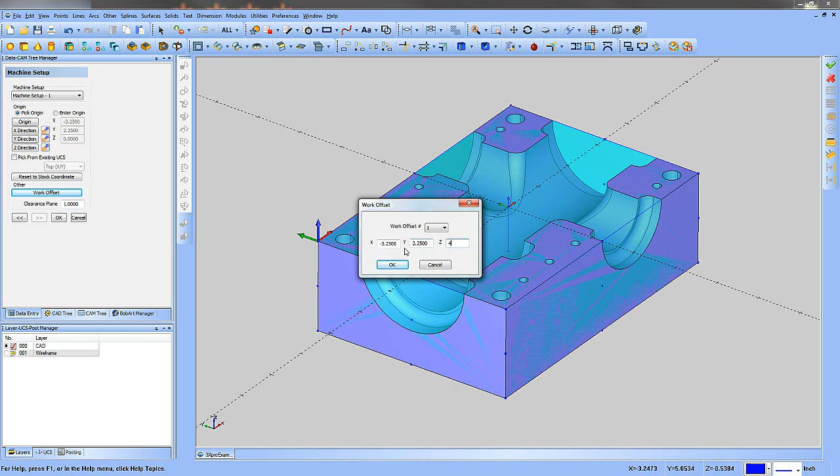The next thing we'll see is our work offset. This is for the guys that have the full machine simulation, to locate this part on the machine so it doesn't show up inside the table. I'm going to say minus 3.25 in X, and in Y we're going to say 2.25, and in Z we're going to go 4 inches high so that it sits up above that table in the correct position. Then we'll just hit OK.

And then over here's our clearance plane. I'm not going to make any changes to that, so we'll just hit OK.

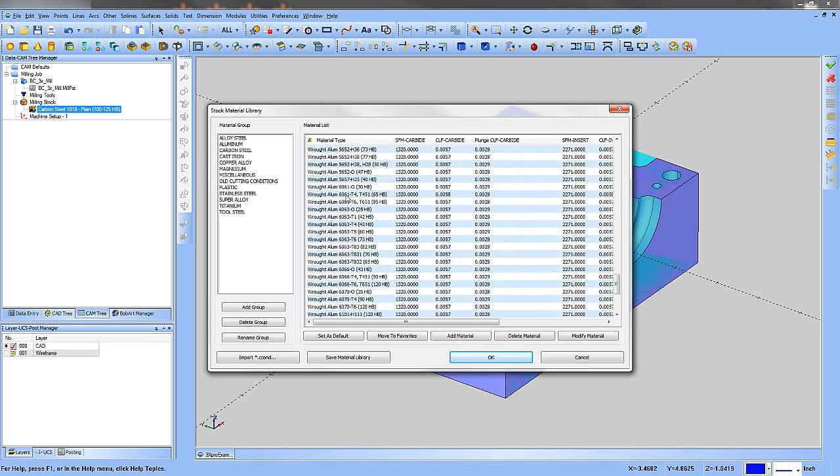Now the first thing we need to do is go and set up our material. We're going to right click on where it says either carbon steel or whatever shows up right underneath milling stock, and then say edit. In this case, I'm going to go to aluminum and scroll down, and pick something like a wrought aluminum, we'll say 6061, and just hit OK, and that's going to change it. Now this controls our speeds and feeds, so when we go through these tool paths, when we get to the tooling page, the speeds and feeds are going to be pulled off of that material.

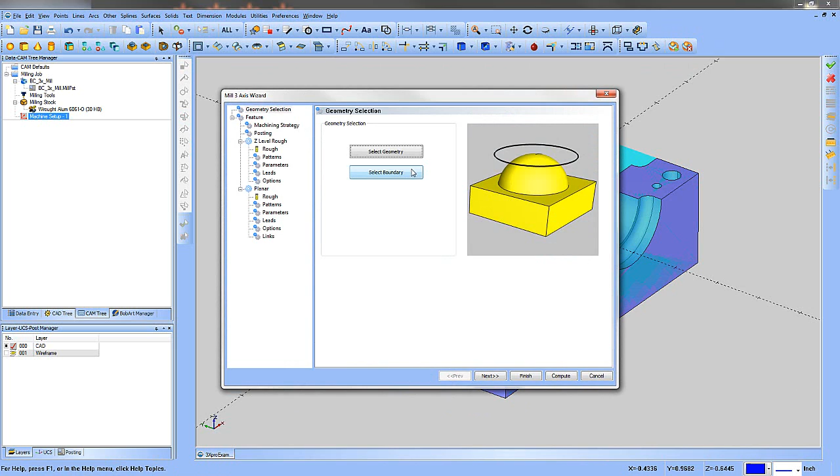So we're going to right click on machine setup, go down to mill 3-axis. We're going to select our geometry, and for 3-axis parts we're usually going to select the entire part. Then if we want to use something to contain the tool to a specific area, we're going to use a boundary. In this case, we're not using any boundary, so we're going to go ahead and hit next, and then say next again.

For our tool path, on this pass we're going to be running two roughing passes. One's going to be a normal advanced rough, and the second one is going to be an advanced rough with a rest rough. So I'm going to go down here and click advanced rough, and then click this arrow to move it over so that we have two advanced roughs.

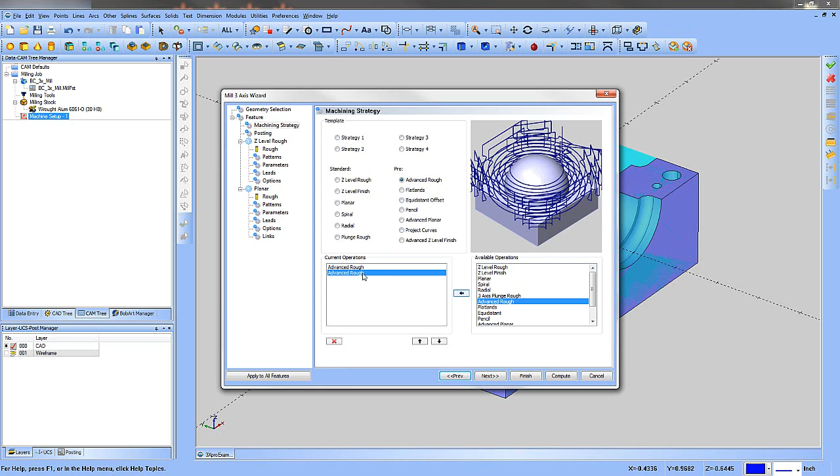Then we'll hit next. Nothing to change here, we're not changing the work offset. We're going to use our G54, go next, and then we have to go set up our tools.

So we're going to go up to our tool crib, go over to end mill rough, and then click add from tool library. We're going to sort by the diameter and then go down and choose our standard length 3/4 inch flat tool, and then just hit OK once and then hit OK again, and it's going to place that tool in there. Now all our speeds and feeds over here are set up off that material, so we're not going to make any changes to this. If we need to go in and change it, you can just uncheck use system feeds and speeds and make any changes that you need. So then we'll hit next.

Our cut patterns, we're not going to make any changes here. We're using an offset, we're going to zig, and we're going to climb mill. And then for our depth of cut for cutting this, we're going to enter a value of...

0.375 and a step over amount of 0.2 with 2 intermediate steps in between each cut. So each pass that this takes at its normal depth of cut, it's going to come through again at the end and clean up all the steps that are left with 2 passes.

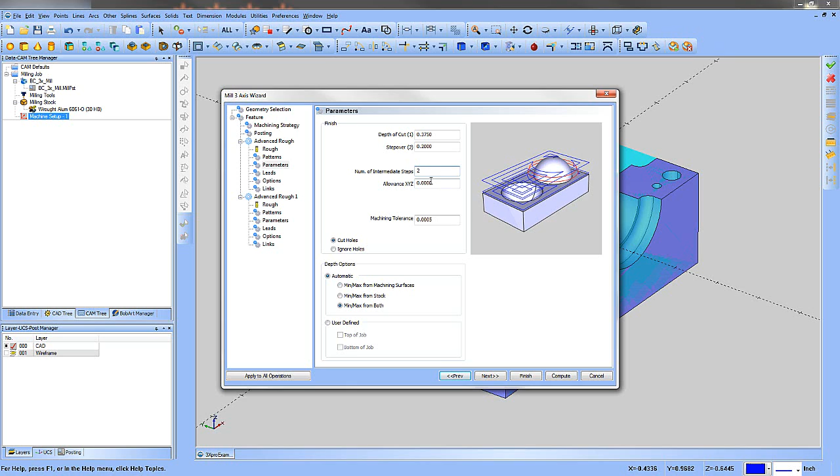So it's going to make those steps a little bit smaller. And then for our allowance in XYZ, we're going to change this to 0.04 and then just hit next.

We're going to ramp into the part using automatic, and we're going to leave our ramp length at 0.25, and we're using a center cutting tool, so we're going to make sure this is checked on. So then we'll go ahead and hit next.

Rest roughing, that's going to be for the second option, so we're not going to do anything to this page. Go next. And then for our links on the first advanced rough, we want to use an S-link and a rapid retract for any large gaps. And then go ahead and hit next again.

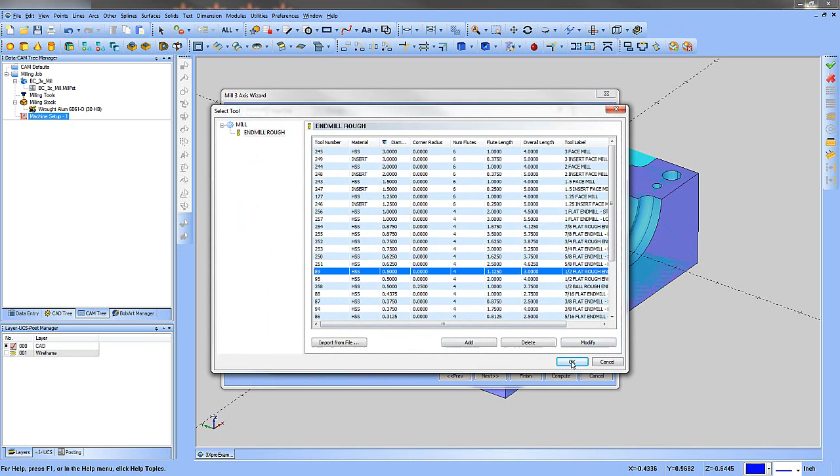And now we're going to go up to our tool crib and then go to end mill rough and then add from tool library. And then we're going to sort by the diameter and go down. We're going to choose our 1/2 inch flat end mill with the standard size. So we'll just hit OK and then hit OK again.

And then the only thing we're going to do is come in and change the protrusion length. Any of this information in here is editable after you pick this tool, and we're going to go ahead and make our protrusion length 1.5 and then go ahead and hit next.

Our patterns, again, we're not going to make any changes there, so we'll hit next again. And for this depth of cut and step over, we're just going to use the defaults. We're not adding any number of intermediate steps, but we do want to use the same XYZ allowance because this is still a roughing pass. So we're going to say 0.04 and then go ahead and hit next.

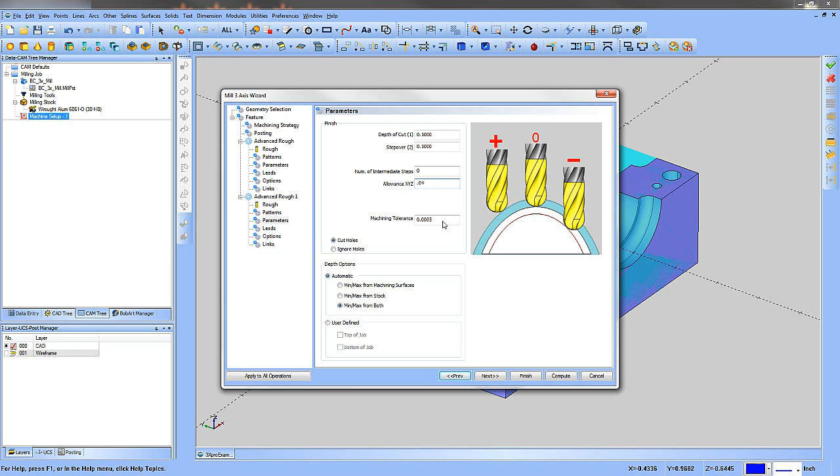We're going to ramp again. And on this one, our ramp length we'll say is 0.2 because we're just using that 1/2 inch tool. And then hit next again.

This is the option where we're going to add that rest roughing in. So we're going to say rest roughing. We're going to use the previous operation so it automatically pulls up the previous tool. And then we'll hit next.

And on this one again, we're going to do an S-link with a rapid retract for large gaps. And then just hit compute.

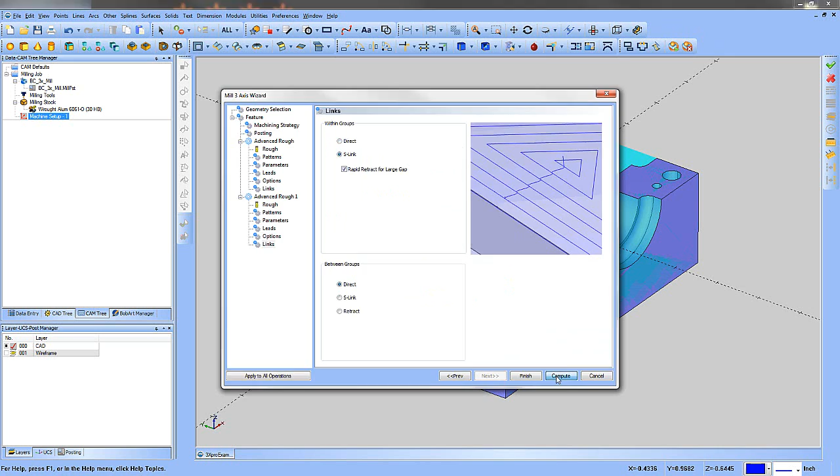So then after the toolpath finishes computing and we see it on our model, we're going to come up here into our cam tree, right click on milling stock and just say blank. And then I could go down to my machine setup and right click on that and go down to blank on blank toolpath. I'm just turning that off for now.

That way we can see these individually by just clicking on the advanced rough, and I'm going to see all the cuts for that advanced rough. And then I click on the advanced rough 1, or if we wanted to rename it, we can right click and say rename advanced rough 1, get rid of the 1 and say rest rough. So we know the difference between the two.

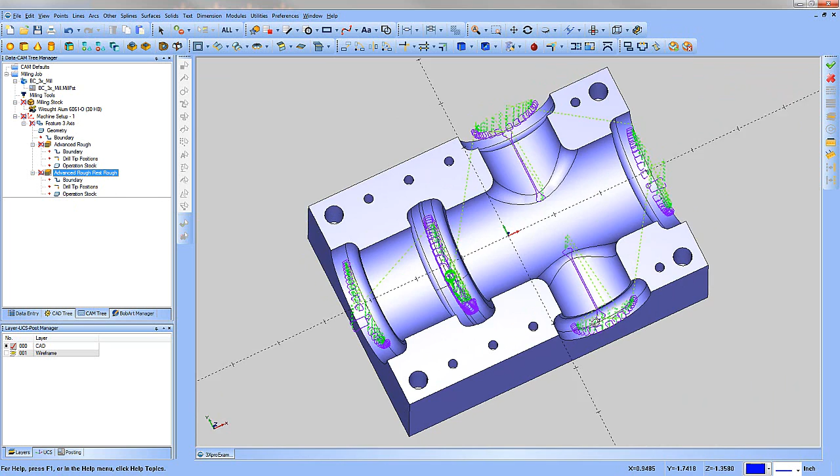So then we click on either of these and we can see just those tool paths being processed. So we'll see that rest rough is going into the areas where this previous tool couldn't clean up very well, so it's going in and fitting into those smaller areas and just giving us a much cleaner cut.

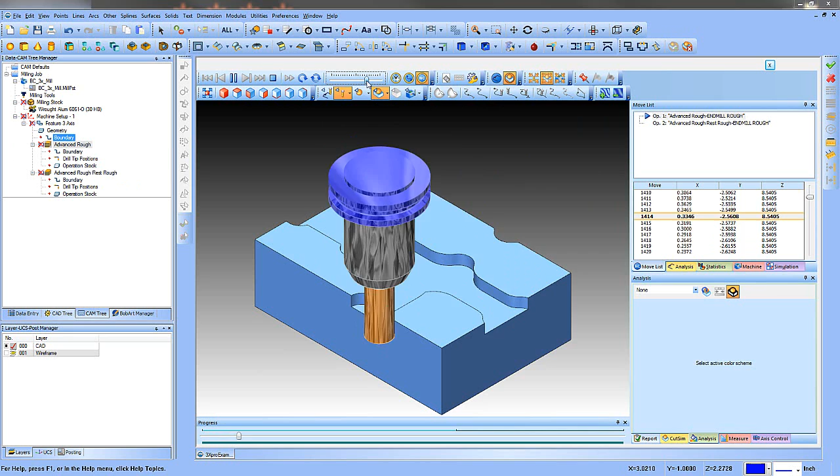Let's go check this out in the simulation. So we're going to go up to modules and then simulation, and then when the simulation loads up you can go ahead and click this button right here to turn the tool path off, and then we'll just hit play and we're just going to see the tool zip around the part, and we're moving pretty quickly.

You could slow yours down using this slider bar. Pay attention to these large grooves here, because you'll see them get cut in half - those are the intermediate steps as it worked its way around. Now we're doing our rest rough, and we're all done. So that's the roughing pass.

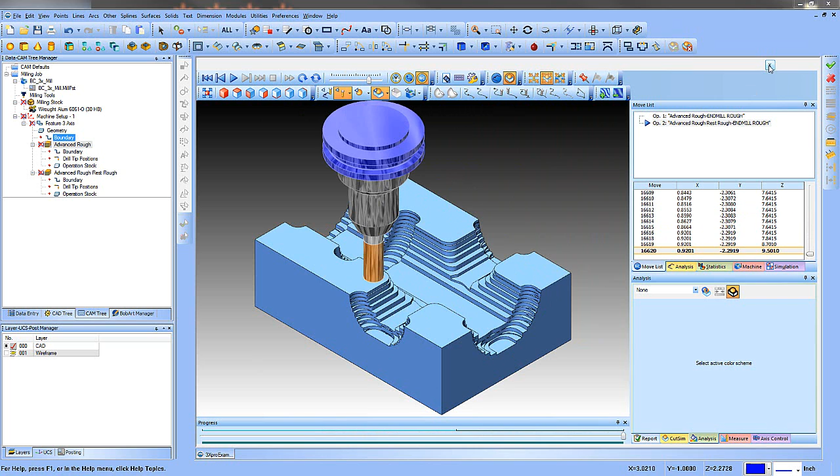Now let's add some finishing passes. We'll exit out of the simulation. Instead of adding another feature 3-axis, we're just going to right click on our first feature 3-axis, say edit, and go straight to the machining strategy page. I'll click on the advanced rough, rest rough that I renamed, and then go down.

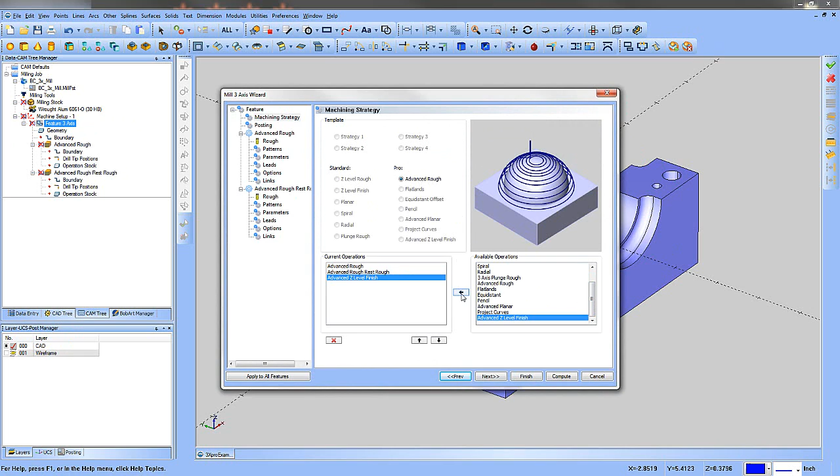We're going to add an advanced Z-level finish and an advanced planar - those two tool paths get added to the list. Make sure you're on the bottom one when you move it over, otherwise you'll have to move things up and down. Then just hit next one time, and you'll see the tree gets populated with all those tool paths.

Now I'm going to go to my advanced Z-level finish, and go up to our tool crib. This time we click on end mill finish and then add from tool library. We'll sort by diameter again, and this time pick our 1/2 inch ball end mill. Click that, hit OK once, hit OK again, and now our tool is set up. If I wanted to, I could change my protrusion length to 1.5 to match the other tool, then hit next.

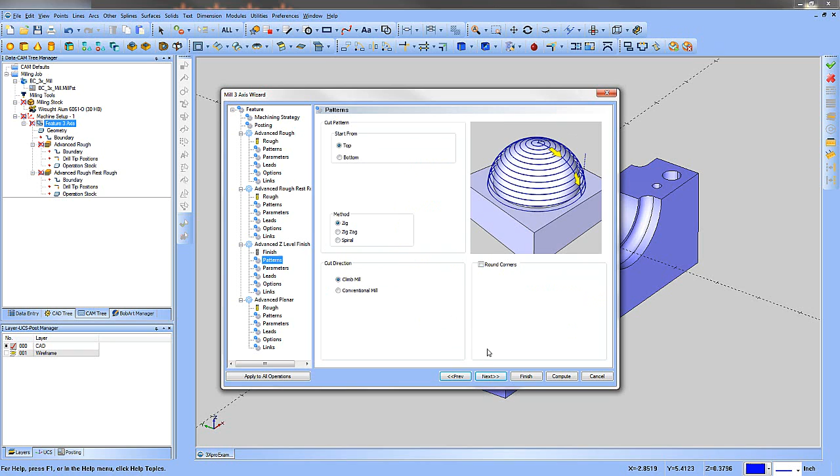We're going to start cutting from the top. We'll be zigging around and climb milling when we cut, so we'll just hit next. Our depth of cut on this - since we used 40 thousandths before - we'll set our depth of cut to 40 thousandths and hit next.

For our leads, we're going to plunge on the entry, but we'll have parallel lead-ins with a length of 0.3. If I click out of that box, we'll see we're using the same lead-in and lead-out - it says same as lead-in, so it selects that for us automatically. Then we'll hit next.

For this one, we're not changing the boundaries since we don't have any, and we're not rest finishing, but we are going to use the angle range. The angle range allows us to only machine between a specific angle - in this case, our start is 45 degrees and our end is 90 degrees, so we're only cutting things between 45 and 90 degrees. That's all we need to change there.

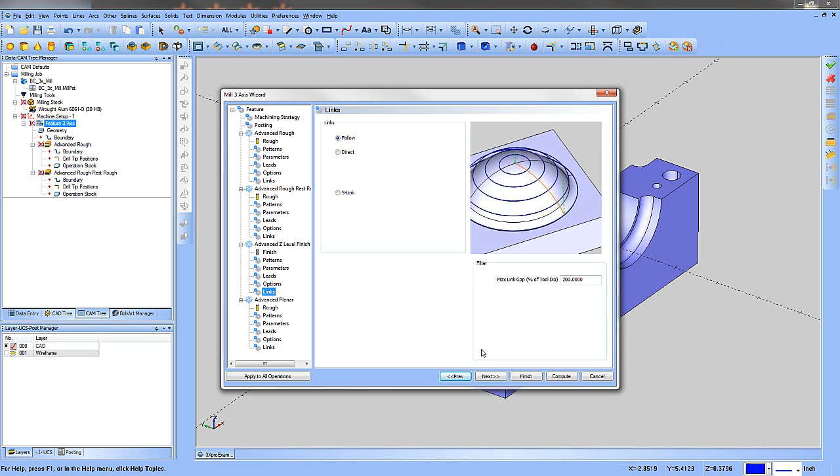We'll hit next, and for our links we'll just use the default, then hit next. For the tool on our advanced planar finishing pass, we'll go up to tool crib, click on end mill finish, choose the same tool as before, hit OK, then hit next. For our cut pattern, we'll zig around the part, lace angle at 90 degrees starting from the lower left corner, then hit next.

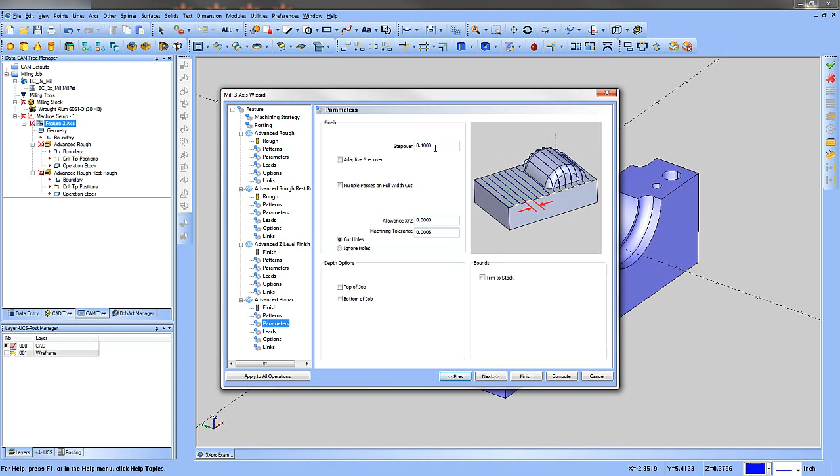Our step over again will be 0.04 - no other changes here. Our allowance stays at 0 since we're finishing now, so we'll hit next. For our leads, we'll choose a vertical tangent, with a radius of 0.1 and an angle of 45 degrees. Then we'll hit next again, and again we're not setting up any boundary limits - we're going to set up an angle range.

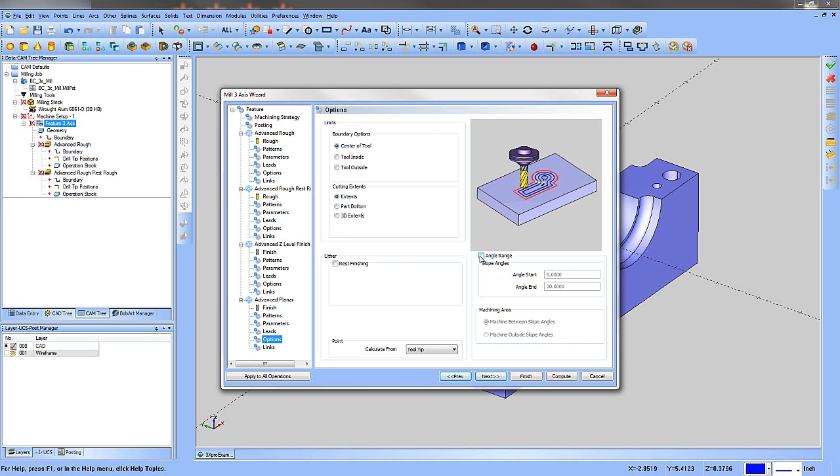For the angle range this time, we're going to start our angle at 0 and end it at 45, so we get that overlap between these two tool paths in between this part.

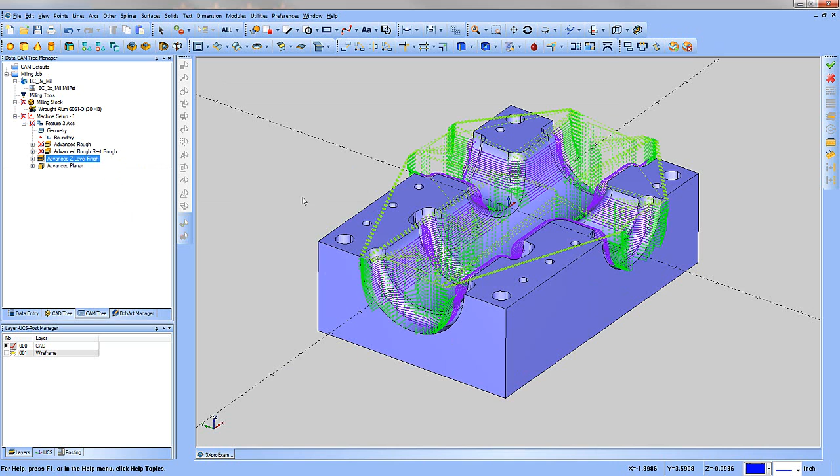Then we're going to hit next. We're not going to change anything on the links. This time, instead of hitting compute, we're going to say finish. If we hit compute, it's going to recompute all the tool paths that are already done. So we're just going to right click on advanced Z-level finish and compute it. After that finishes computing, we're going to right click on advanced planar and compute that one.

So then after we have all our toolpaths computed, let's go ahead and blank out our advanced Z-level by clicking blank, and then right click on advanced planar and blank that one out as well. That way we can go through - we have our advanced rough, rest rough, Z-level finish, and advanced planar.

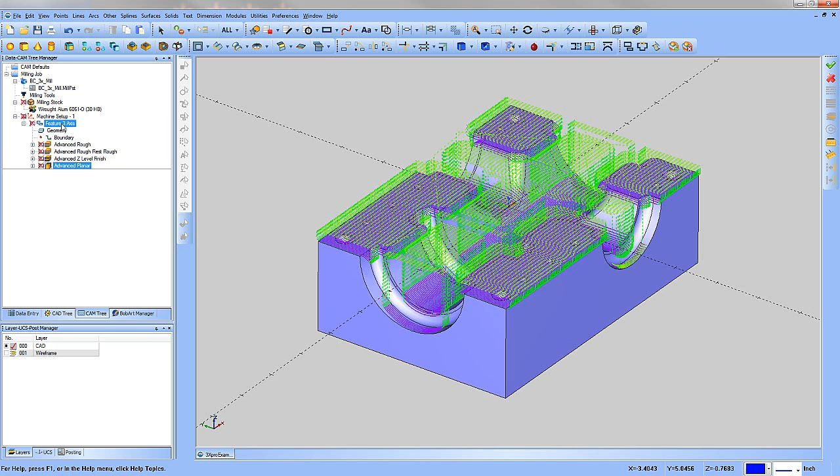Now one thing I'm seeing automatically is that this is cutting across the top of the part, and I don't want it to cut that angle. So what I'm going to do is right click on feature 3 axis and say edit, then go down to my parameters on my advanced planar, and set my top of job as minus 0.5. That way it's starting a half inch down.

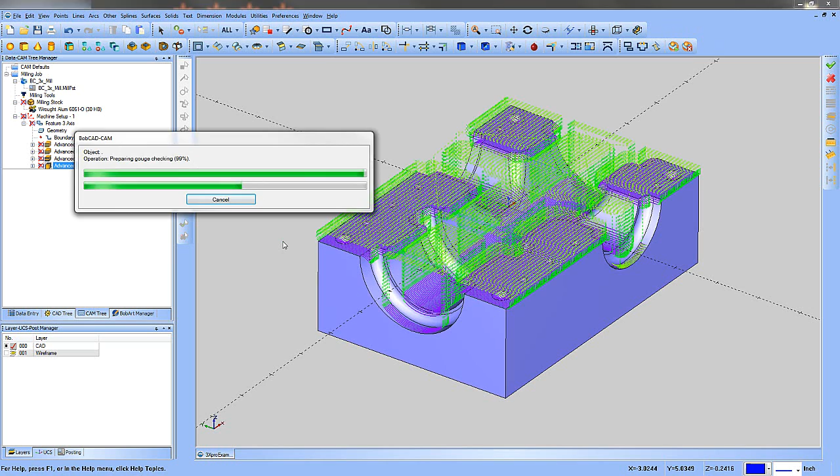So then I'm going to go ahead and finish my part, right click on advanced planar again, and hit compute. Now when it finishes computing, we only get the toolpath down inside all these crevices.

So I see my advanced Z-level finish, which is cutting from 45 to 90 degrees, and then my advanced planar, which is cutting from 0 to 45 to clean up the rest.

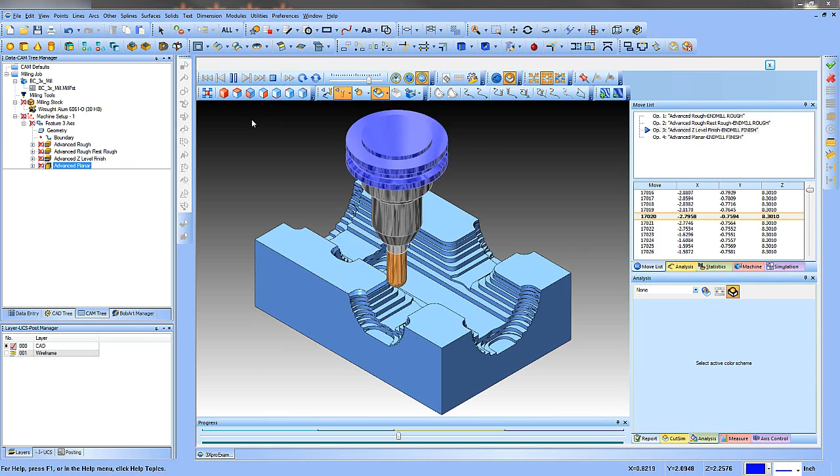So let's go ahead and check this out in simulation. Again, we're going to turn off our toolpath by clicking that button. On this one, we're going to skip through the advanced rough and rest rough that we've already watched, so I'm just going to go to Op 3 on my Move List tab. Then when we hit play from here, all we're going to see is the finishing passes of everything - we're just going to see this rip around the part.

Now this is again only going from 45 to 90, so it's leaving these steps in here. Then it's going to come back in and do our planar toolpath to clean everything else up right here.

Let's speed it up a little bit.

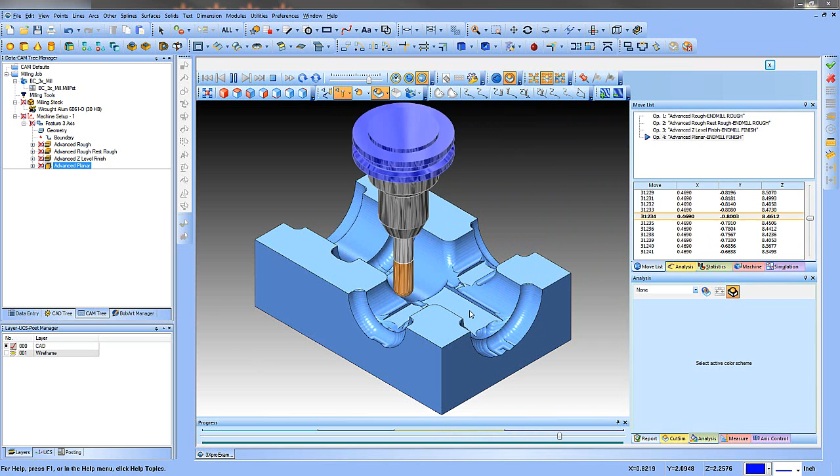So then we can turn off the tool to see the finished product. And there we go - so we have the part in the simulation.

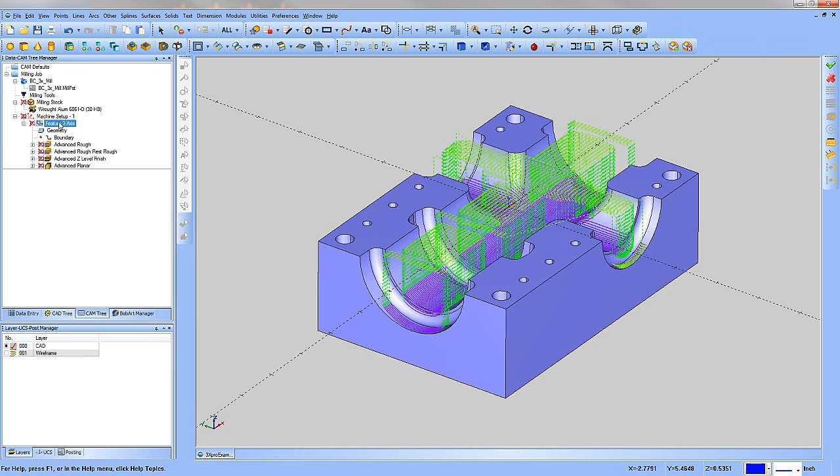So the last thing we need to do is just go clean up all these radiuses one time. What we're going to do is right click on our feature 3 axis again, say edit, go to the machining strategy, click on the bottom toolpath we already have, and then add a pencil mill.

So we're going to click pencil and just move it over on this list, then go ahead and hit next - it's going to repopulate that tree. So I'm going to move this down and click on my pencil, my rough tool for this.

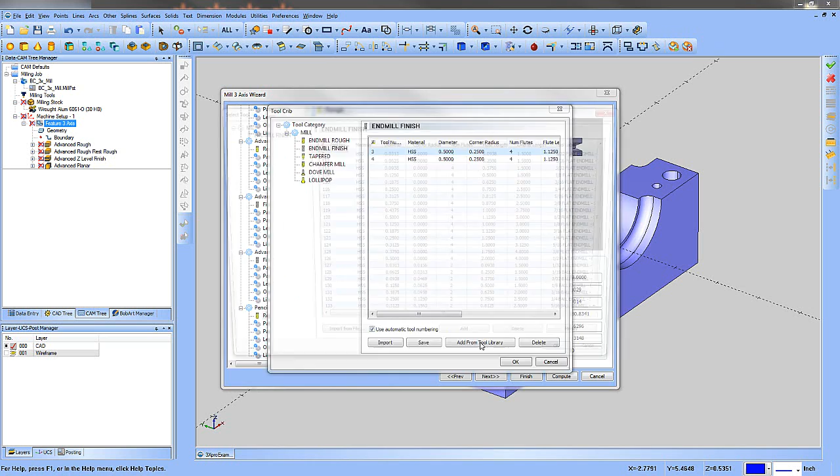I'm going to go up to my tool crib, click on end mill finish, and say add from tool library. We're going to sort by the diameter, choose the 0.375 ball end mill, then hit OK and hit OK again. So now we have that tool set up in there.

So we'll hit next. There's really not many options for pencil mill - it's just going to go in and clean up all these corners, so our patterns are going to be whatever it chooses. Click next, no changes on this page.

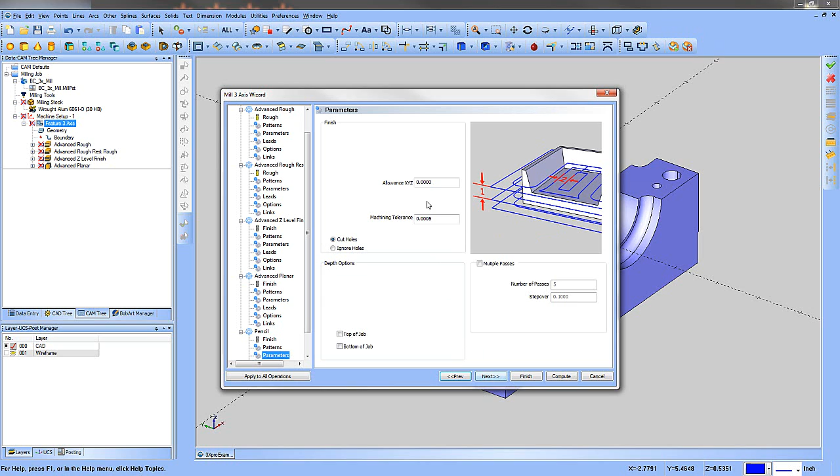We'll hit next again. The only thing we want to do with this is make parallel lead-ins with a length of 0.25. Hit next, no changes here - we're cutting all our angles. Hit next, and then our links we're just going to have it follow.

So we can go ahead and finish this, right click on pencil, and compute it. You'll see very small tool paths here, just coming in and cleaning up all these radiuses. We'll blank that out so we can click on it and see it when we want, and then do one final run through of our simulation.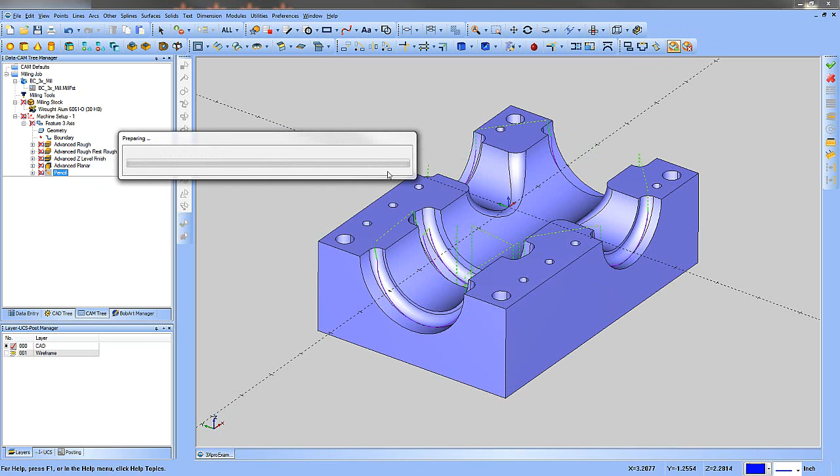So we're going to load this up, and again we'll turn off the tool path. This time I'm going to skip down in my move list to the pencil mill, so it's going to load everything up until the pencil mill, but we're not going to see that cut yet. Let it load, and then we can hit play and see what that pencil mill is going to do for us. It's going in and really fast cleaning up those corners.

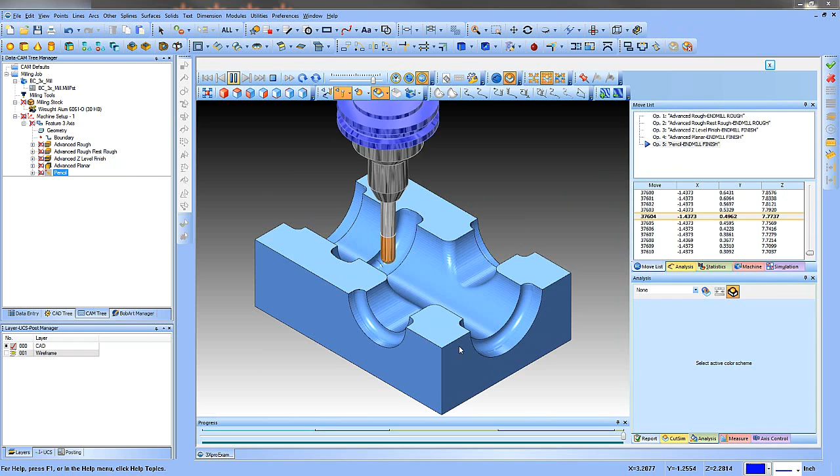Now we're going to go to our analysis tab down here. Be careful, there are two analysis tabs—make sure you're on the one that shows all these operations when you click the drop down. We're going to go to deviation. For this, we'll set our gradient minimum to minus 0.03 and our gradient maximum to 0.03. Then we'll click this button for the min-max detection, and then refresh the model using this button right here.

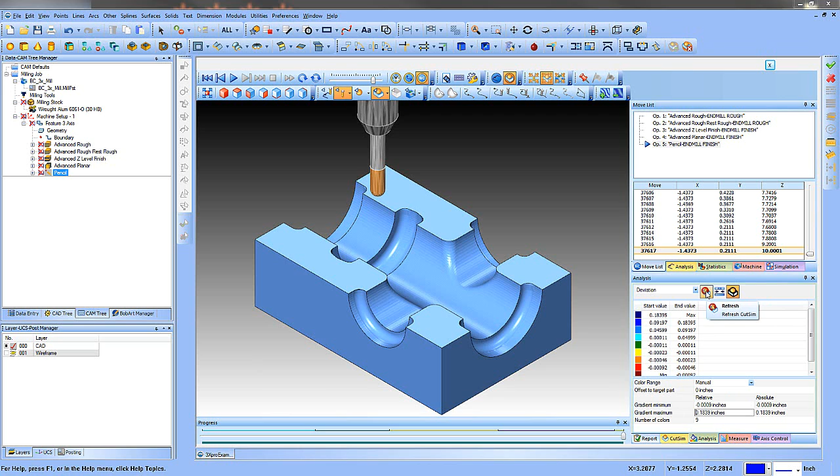So we're going to refresh it, and it's going to show up with a whole bunch of these colors. Then we can go in and see what's cut to size and what areas are off a little bit. You'll see all your tolerances coming around the part, all the areas that may need a little more work. So then we can close out of that.

And then for our final toolpath, we're going to add these drilled holes in here. We'll right click on machine setup, go to mill hole, and then select our geometry. We're just going to pick the top edge of each one of these holes, like this, come over here and grab these guys, and just work your way around the part until you get all the holes.

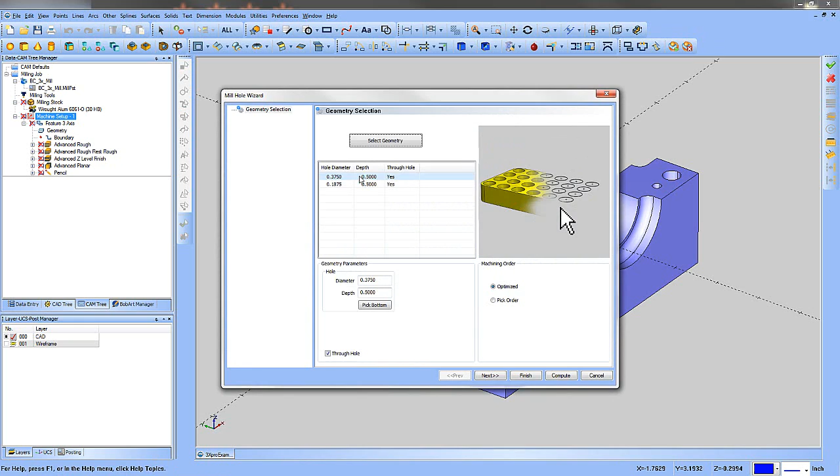And then hit OK. For our larger holes, we're going to say pick bottom—if we made our model correctly, we should be able to come in and just pick the bottom edge of that hole, and it's going to give us our total depth. For our smaller holes, we'll pick bottom on these ones, then pick the inside of that, and we're cutting down to that half inch.

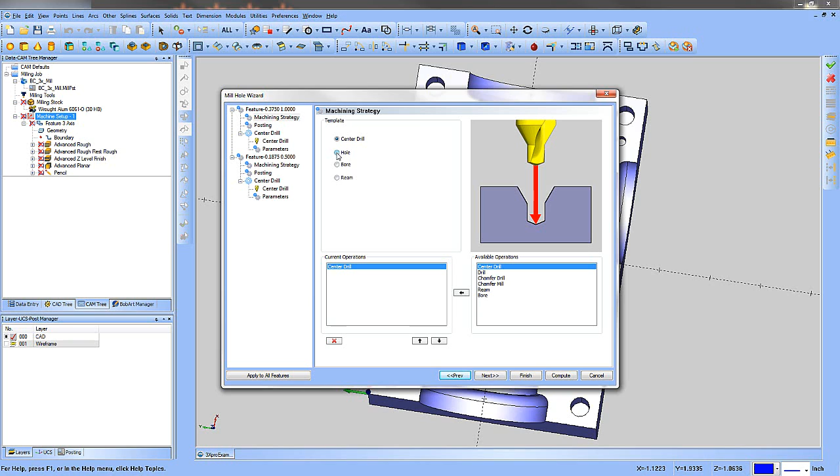So then we'll go next, next. I'm going to do a center drill and a drill for each one of these, so I'll go next, next. For our center drill, I'm going to just use the default tool and the default parameters. And then for our drill, I'm also going to use the default tool with the default parameters.

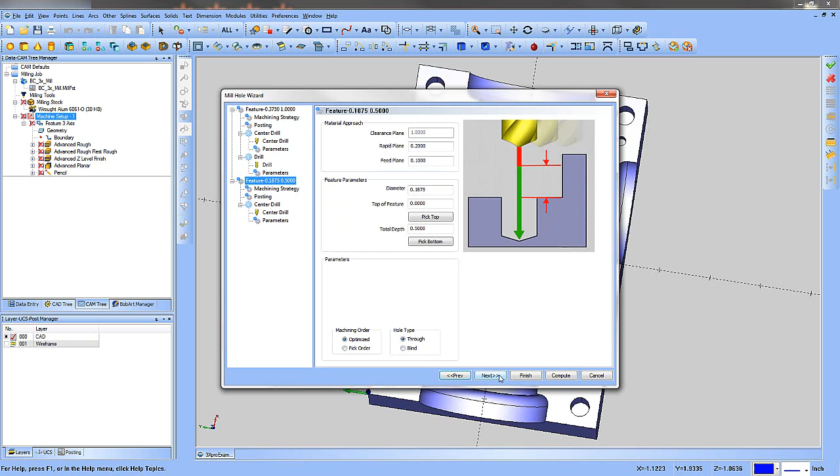Except on this one, let's go ahead and peck. We're going to override our peck and make it an eighth inch for the first peck and an eighth inch for the last peck. Then go next, next—our machining strategy for this one will be a hole, so it's a center drill and a drill, again just using the defaults. Then all the defaults, and this one we won't peck on. We'll go ahead and hit compute, and now we have all the drilling as well.

So then if we right click on our mill drill holes and blank that out and that out, that way we can come in and see just the center drills and then just the drills.

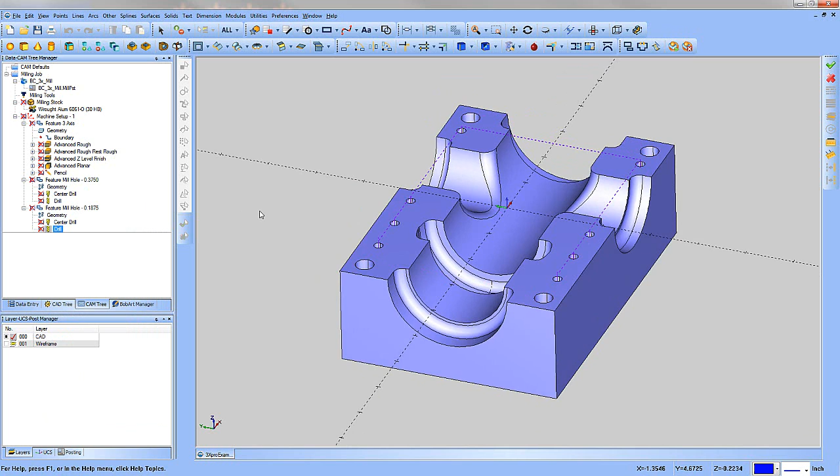And then be sure you go in and always put your work back into your isometric view by hitting Control-7 and then F on your keyboard to fit all. And remember to save your part when you're all done. That concludes the CAM side of the 3-Axis Pro example.